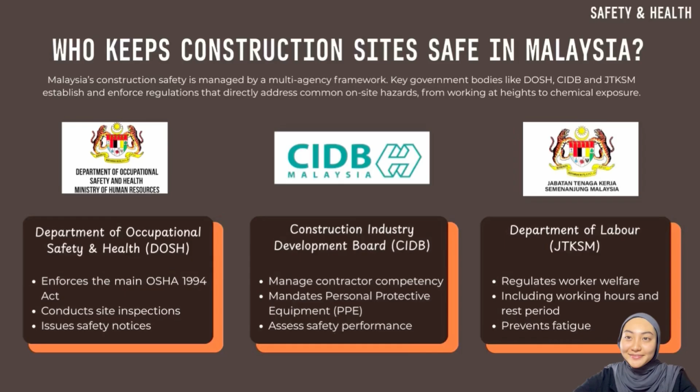Next, I will be highlighting several key safety and health issues faced by construction workers in Malaysia and how these issues can be mitigated through existing regulations and industry guidelines enforced by authorities. First, for working at heights, the main references are the Occupational Safety and Health Act 1994 and the CIDB Site Safety Guidelines. These regulations require contractors to ensure that workers use safety harnesses, conduct proper scaffolding inspection, and maintain adequate supervision to prevent falls.

Next, falling objects are addressed under the OSHCIM 2017 framework and CIDB safety guidelines. These emphasize proper material storage, installation of safety nets, and the use of tool lanyards to protect workers operating below elevated platforms. When it comes to electrical hazards, both the Factories and Machinery Act 1967 and OSHA 1994 are applicable. They mandate that only certified electricians handle electrical installation and that regular inspection, testing and tagging of electrical tools are performed to avoid electric shocks or fire.

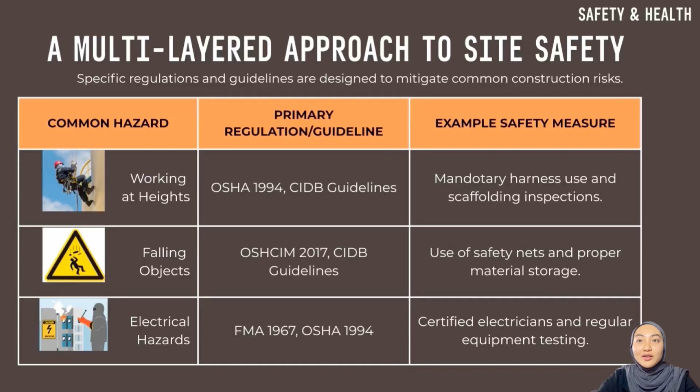So I would like to present on the quality management system for the construction industry in Malaysia. Basically, quality management in construction has evolved from reactive inspection-based practice to an integrated system that emphasizes prevention, standardization and continuous improvement. A quality management system provides a structured framework for planning, executing, monitoring and improving construction processes to achieve consistent project outcomes. Internationally recognized systems such as ISO 9001 and industry-specific assessment tools such as QLASSIC have been widely adopted to improve construction quality performance. This system formalizes procedures, responsibilities, documentation and performance measurement.

ISO 9001:2015 is one of the most widely implemented QMS systems used in the Malaysian construction industry. What is ISO 9001:2015? It is a QMS standard currently aligned around the process approach, PDCA cycle and risk-based thinking. ISO 9001 forces firms to define processes, manage suppliers, document inspections or tests, perform internal audits and measure customer satisfaction, all of which reduce variability and defects.

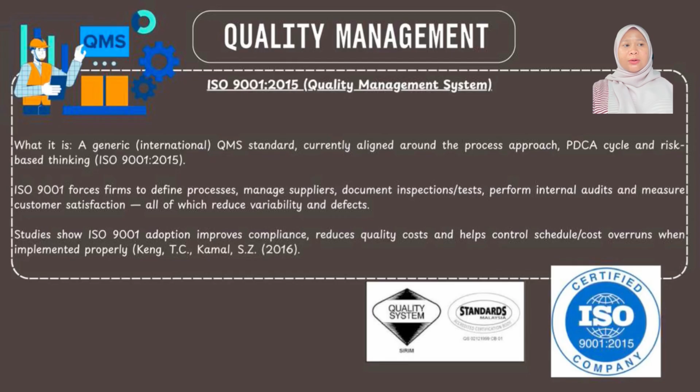Studies show that ISO 9001 adoption improves compliance, reduces quality costs and helps control schedule or cost overruns when implemented properly. So what is QLASSIC? QLASSIC is Malaysia's CIDB assessment tool to objectively measure workmanship quality of building works by using scoring templates across trades, which are structure, architecture or finishes, and M&E works. It benchmarks workmanship and produces a project score.

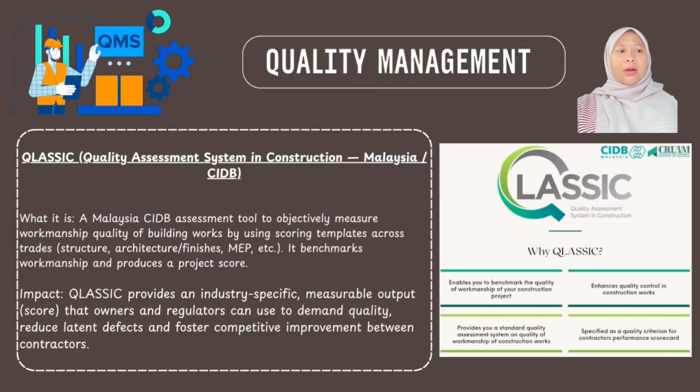The impact of the QLASSIC system is that it provides an industry-specific measurable output score that owners and regulators can use to demand quality, reduce latent defects and foster competitive improvement between contractors. So why choose QLASSIC for the building? First, it enables you to benchmark the quality of workmanship of your construction project. Second, it enhances quality control in construction works. Third, it provides a standard quality assessment system on quality of workmanship of construction works. And last, it is specified as a quality criterion for contractors' performance score.

The ISO 9001:2015 revision introduced risk-based thinking, requiring organizations to identify potential risks and opportunities that may affect quality objectives. This shift is particularly relevant to construction projects where risks such as design errors, material non-conformance, subcontractor performance and site conditions directly influence cost, schedule and safety outcomes. Empirical research demonstrates that ISO 9001 certified construction organizations tend to show improvement in documentation control, supplier management and internal auditing, which contribute to reduced non-conformance and improved project predictability.

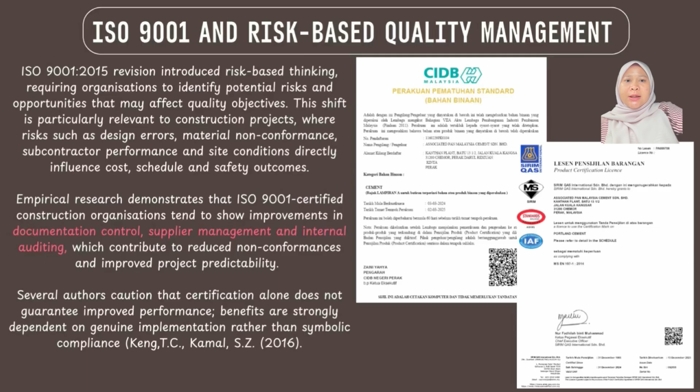Several authors caution that certification alone does not guarantee improved performance. Benefits are strongly dependent on genuine implementation rather than symbolic compliance. In compliance with ISO 9001, construction materials used in the construction project need to have the PPS certificate, which is a certificate of standard compliance, or come together with the SIRIM certificate. This is to ensure that all the construction materials used for the project are in good condition.

QLASSIC, developed by the Construction Industry Development Board (CIDB), serves as a standardized mechanism to objectively assess workmanship quality in building projects. QLASSIC focuses on output quality, evaluating completed work such as structural elements, architectural and mechanical and electrical installations. The introduction of QLASSIC has enhanced benchmarking across projects and contractors, enabling stakeholders to quantitatively compare workmanship performance. Studies indicate that higher quality scores are associated with fewer post-handover defects and improved client satisfaction. Nevertheless, adoption remains inconsistent, particularly in private sector projects where QLASSIC assessments are not contractually mandated.

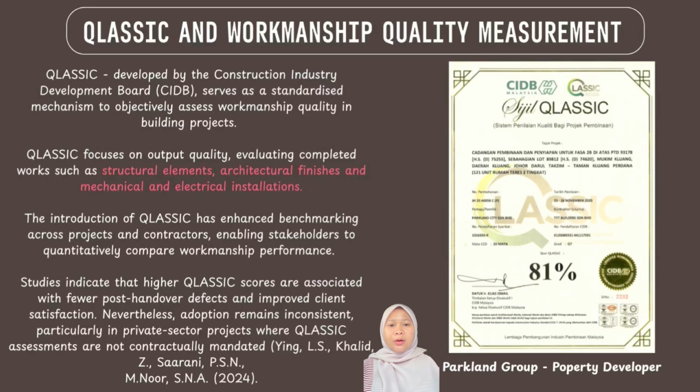This shows an example of a QLASSIC certificate provided by CIDB Malaysia to the property developer Parkland Group, for one of their housing projects in Kluang, Johor. This will enhance the satisfaction of buyers of their development. By getting this cert from CIDB, indirectly this will make their buyers more confident that their property is in good condition. They can convince buyers to buy more property from them, not just for this project but for future projects also. So how does QMS align with Construction 4.0?

Construction 4.0 is a strategic construction plan from 2021 until 2025, which targets digitalization, productivity, sustainability and integrity across the construction supply chain. QA/QC systems are a natural partner because they provide the governance layer that makes digital tools effective. First, data and digital process. CR 4.0 promotes BIM, IoT, prefabrication, which is IBS, and digital workflows. QMS provides standard data models, inspection workflows, and acceptance criteria, so BIM and IoT can be validated and acted upon automatically.

Second, productivity and fewer defects. Standardized QA processes reduce on-site rework, which supports CR 4.0's productivity targets. And governance and traceability: CR 4.0 digital tools enhance real-time quality monitoring, data accuracy and traceability. Consequently, QMS acts as an enabler rather than a barrier to Construction 4.0 implementation.

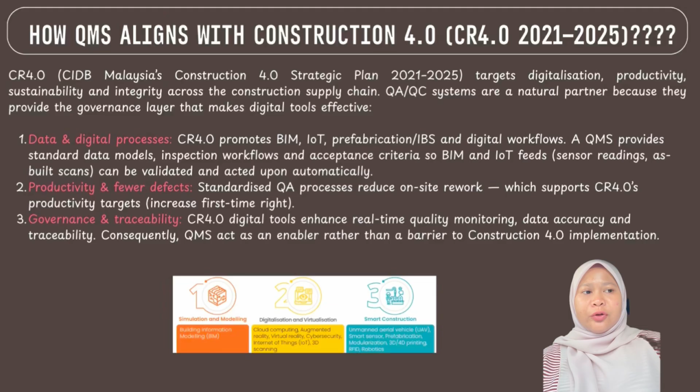There are a few sources of construction waste in Malaysia. The first one is during the design stage, which can cause a lot of waste due to poor design planning and too many design changes during construction. The second one is during the construction stage: poor material handling, poor material ordering causing so much wastage, and poor supervision. The third one is demolition and renovation of old buildings and refurbishment projects. This can cause a lot of concrete waste.

One is site management issue, due to lack of skilled workers, that can cause a lot of problems and a lot of doing it wrongly, causing a lot of waste due to the need to rectify the work. And the next one is poor supervision.

Next is current common practice of construction waste management in Malaysia. The first one is through the landfill disposal method. This method is currently used as a major waste management method to reduce the construction waste. The second one is the 3R concept: recycle, reduce and reuse. This 3R concept is based on the idea of fully utilizing the resources before it goes to the disposal stage.

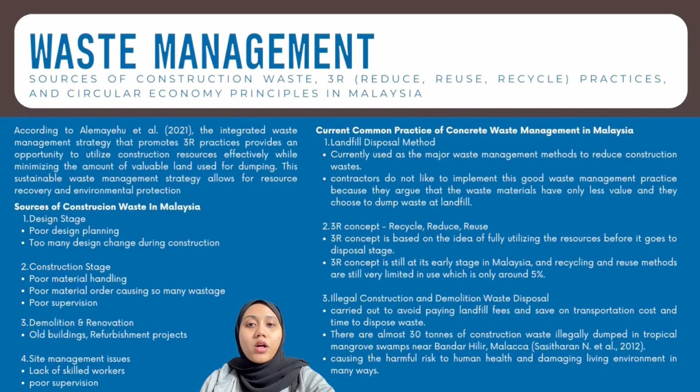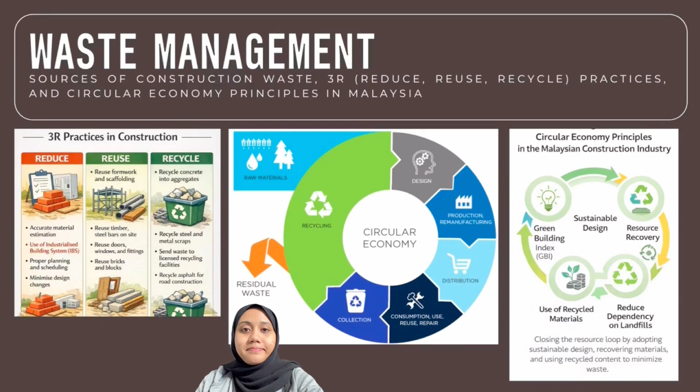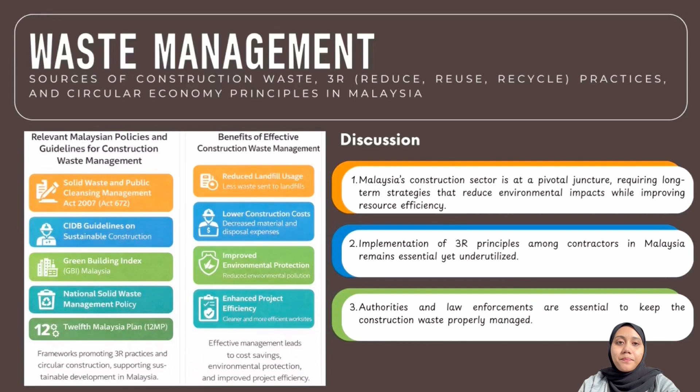For this section, I will explain the integration and recommendation of safety and health, quality and waste management in construction projects. Firstly, safety and health, quality management and waste management should not be treated as separate systems. In construction projects, these three elements are closely interrelated. Good safety practice helps reduce accidents, which in turn reduces rework, delay, and material wastage.

At the same time, effective quality management prevents defects, which minimizes the need for demolition and rework, and therefore reduces construction waste. Proper waste management also improves site cleanliness, which contributes to a safer working environment and better workmanship quality. This shows that a safe site supports quality work, and high quality work generates less waste.

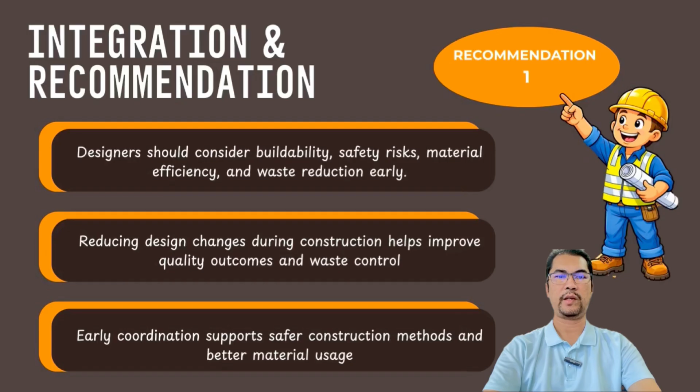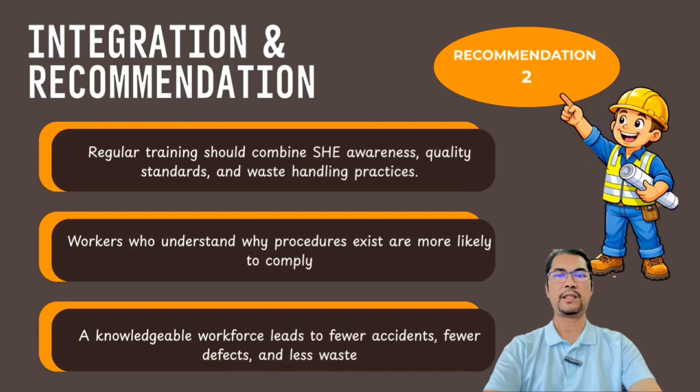Next, integration on site means using one coordinated management approach instead of managing each element separately. For example, toolbox meetings can include safety hazards, quality requirements, and waste segregation at the same time. Risk assessment can consider safety risk, potential quality failures, and waste generation in a single process. Quality inspection checklists can also be aligned with safety inspection and waste control measures. This integrated approach improves site efficiency, compliance with regulation, and overall project management.

In terms of recommendation, integration should begin at the planning and design stage. Good design planning can reduce safety risk, improve buildability, and minimize material wastage. Reducing design changes during construction helps improve quality outcomes and supports effective waste management.

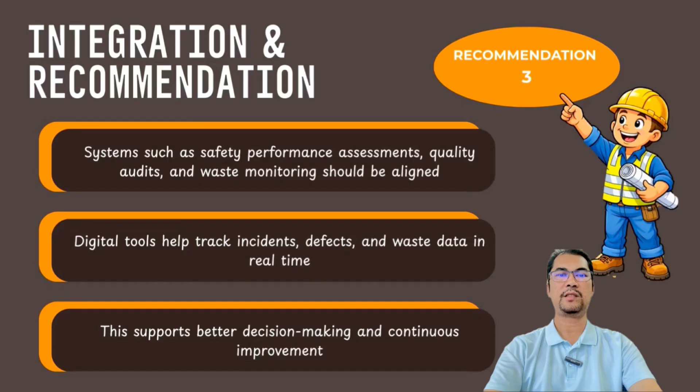Another key recommendation is training and awareness. Workers and supervisors should receive continuous training that combines safety procedures, quality standards, and waste handling practice. When workers understand the importance of these practices, compliance improves, leading to fewer accidents, fewer defects, and less waste. Finally, construction organizations are encouraged to adopt an integrated management system supported by digital tools and performance assessment systems.

In conclusion, integrated safety and health, quality and waste management is essential for achieving safer sites, higher construction quality, reduced environmental impact, and successful project delivery.

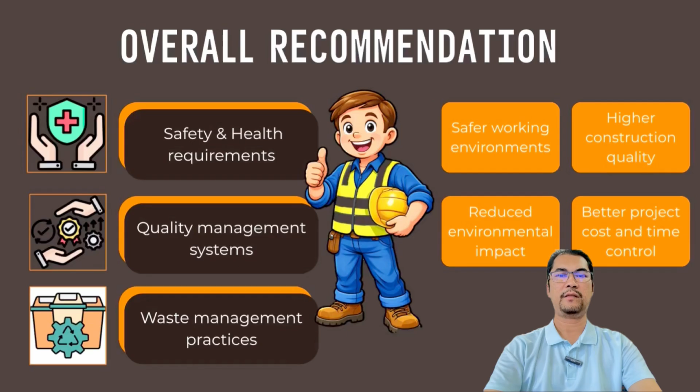In a nutshell, the Malaysian construction industry faces ongoing challenges related to safety and health risks, quality issues, and construction waste generation. Enhanced safety practices improve work efficiency, quality management reduces defects and rework, and proper waste management supports environmental sustainability. An integrated approach is essential to enhance overall project performance, worker safety, and sustainability.

For future directions, emphasize integrated management systems that combine safety, quality, and waste management practices. Wider adoption of modern technologies under Construction 4.0, such as digital monitoring, BIM, and automation.